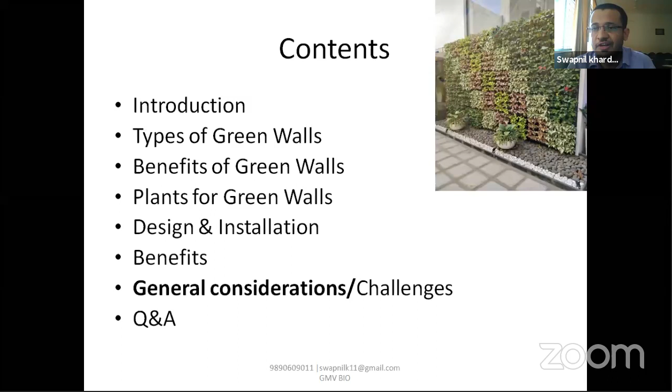In today's roughly 1 hour 15-minute session, I'll talk on introduction to green wall, types of green wall, benefits of green wall, and the plants used for green wall. There are some 70 to 80 different kinds of plants used, but I won't be able to cover all of them. I'll also cover how design and installation is done, and the benefits. The most important part of today's session is the benefits, and then we'll see what challenges we and our competitors face in this field.

As I'm talking about our company establishment, the goal of our company was not to get revenue or run behind revenue. Our purpose was just to cover up all the cement walls with the help of greenery, beautiful landscape gardening. That was the aim behind the setup. We got a good response, so we'll talk later in detail.

The slides I've mentioned contain some theoretical parts, but I'd like to show some images highlighting case studies, the problems we faced, or the idea behind setting up a green wall. I'll talk more on that. So what is vertical gardening or green wall?

It is a special kind of urban gardening suitable for small spaces, particularly for decorating walls and roofs in various styles. So whatever wall you have in urban places - we're not talking rural places, though it can be done there too - whatever kind of wall you have, we can make it look aesthetic. We can change the aesthetic look of that wall. That is nothing but a green wall. The name itself indicates that the cement wall gets covered, and we are here to cover that cement wall and convert it into a greener form.

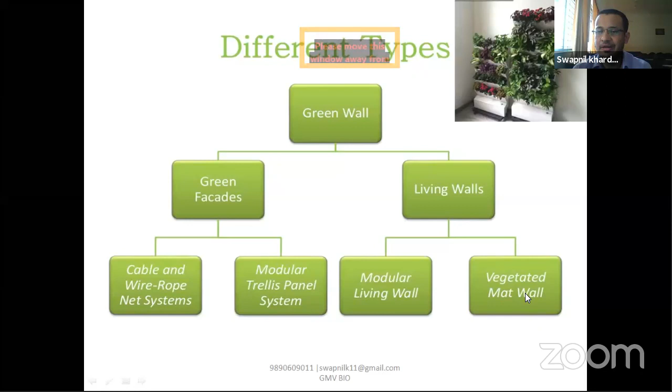Second one, modular trellis panel system. Living wall is again divided into modular living walls and vegetated mat walls. The nomenclature given to this type of green wall, you will come to know with the help of images, or with the help of small content which I'd like to share. So first we'll talk about green facades.

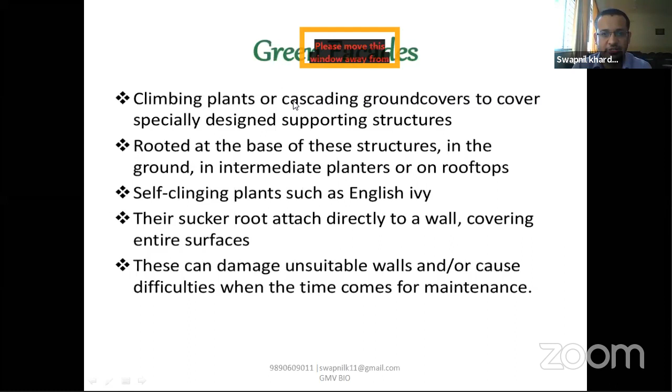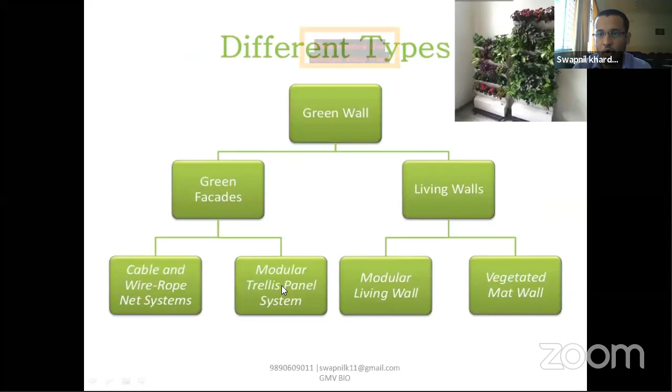What are these? If you look at the images, you will come to know the types of this green facade - cable and modular. So I'm talking first about the cable part - cables and wire rope. From this image you will recognize how we can develop a green wall out of cables and wires.

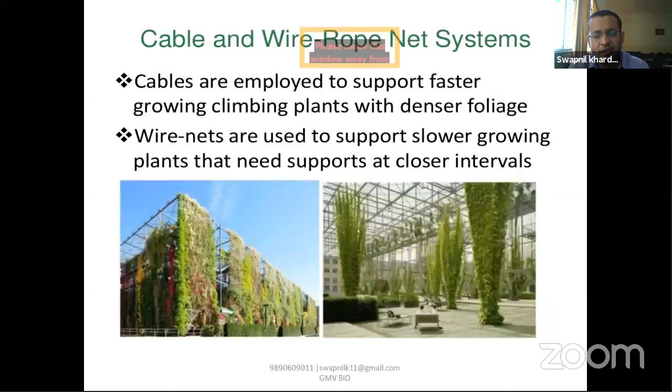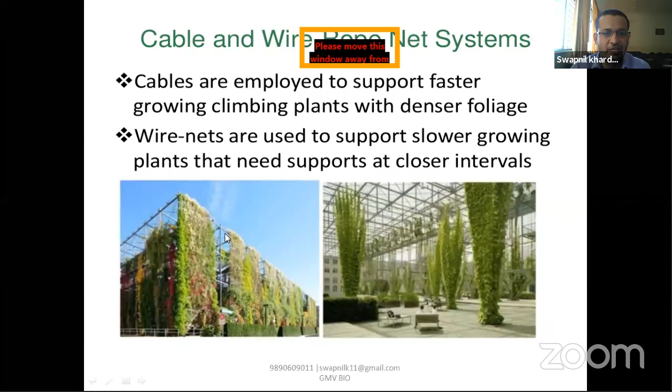Take an example of climber plants, different kinds of climber plants. What is the simple technology done here? This is not what we do, but it's a topic we need to cover. These different types of climber plants - we get the plant and install it on the land, and with the help of cable, these plants will climb up the cable and form a wall. You can see with the help of this - this is the cable and rope net system.

Again, second is the modular system. This is also applicable to plants which are creepers, which climb on a particular wire or any kind of physical place where it's easy for plants to creep up and form a wall. This is used for a small place or small premises - any kind of design can be formed out of this.

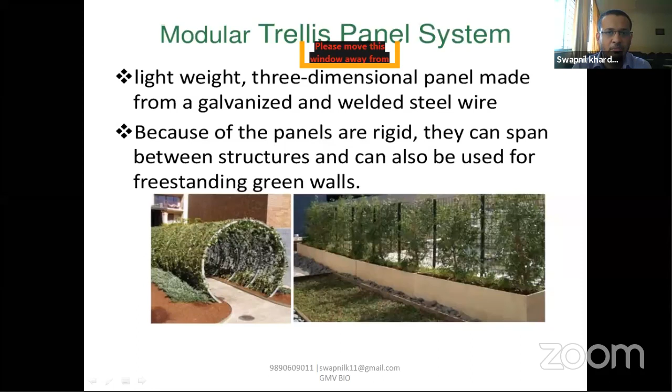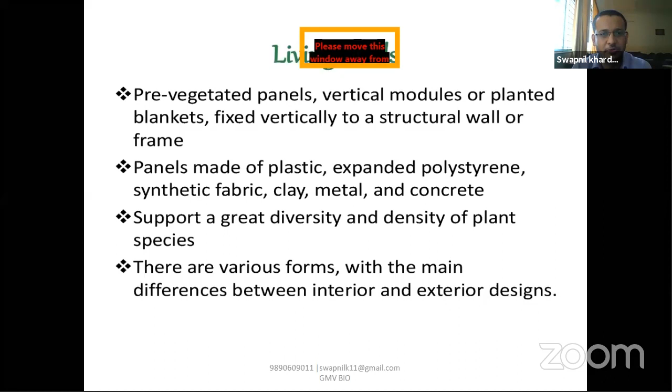So moving further, living wall - this is our core business, this is where we are into, green wall. So how it is done, I will directly show instead of theory. I don't believe in all the theoretical stuff - I'd like to focus more on the images so it gets clear from both angles. So whatever I'll be speaking is right here, and I will show what we are into.

We'll come to that slide for what kind of panels we have, but this is how it works. We first take a picture and form a design of that, and give information on what can be done, whether it is indoor or outdoor. So in short, this is how we work, this is how we install green wall.

The basic requirement for this modular living wall is that we just need any physical cement wall structure. It might be in any condition, it doesn't matter at all - it should just be a wall which is vertical. We'll be installing a green panel to it, that's it. Coming back to our primary objective - that is to convert your physical cement wall into a green wall. This is what we are into.

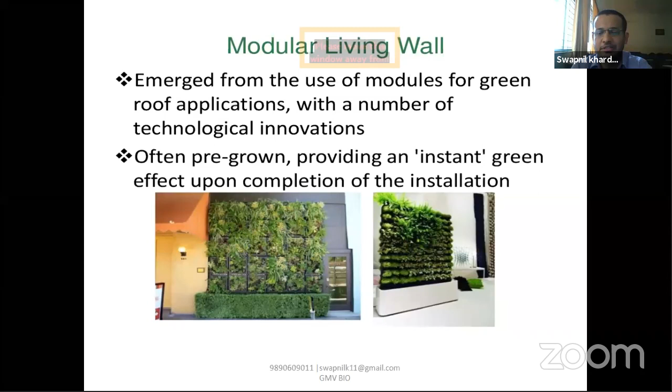This is also one of the vegetated mat walls - we are not into this, but you can see in this case they have a panel system which works as a mat, and the plants are installed in that mat, and it covers the entire wall. You can see from this image the cement wall has been converted into a good greenery wall. From this, I just want to deviate a bit.

When we started in 2017, there were problems. Most of the clients were saying, yeah, it's coming, but there will be a big maintenance cost for the planting and all the stuff - we need to take care of that.

Why don't you switch yourself and go towards artificial green wall? I haven't mentioned that concept in these slides because that is not our core objective of this business. Artificial green wall is okay, you install it once and forget about maintenance. What happens is you get a panel set, just like tiles you purchase from any store, 2 by 3 feet panels, and you just paste them with glue to the cement wall. That's the only thing that happens in artificial green wall.

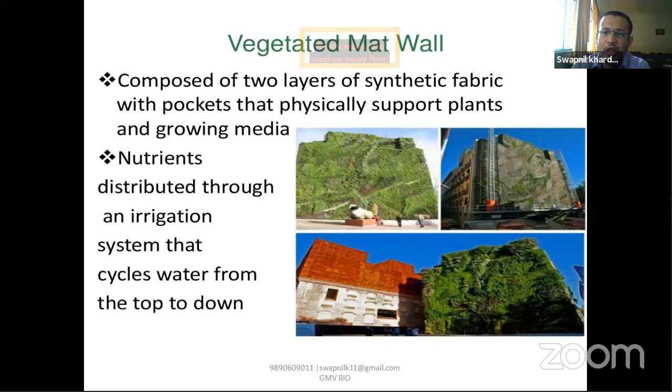Our core focus is to set up only green plants, natural green plants, not any kind of artificial plants. So talking about different plants used in this modular green wall system, I will only talk about the modular green wall system because that's our core business. We are not into any mat system or any artificial wall system, we are only into modular green wall installation system.

So from our side, what kind of plants do we use? As I already mentioned, there are 70 to 80 different kinds of plants that can be used and installed in a green wall. Broadly speaking, we have bifurcated these plants into two categories: first is indoor plants, and second is outdoor plants. Indoor plants are the ones which can survive and give good results in shaded areas. Outdoor plants can survive and sustain in any outdoor condition, whether it's too hot or rainy. So these are the two types of plants we have bifurcated.

Now talking about plants, the most important thing is when we have a discussion with clients, their question is usually based on something they searched on the net, Pinterest, or whatever source they have. They just show us an image on WhatsApp saying this is the kind of green wall we want. We appreciate that they do the search and come up with different plant ideas in front of us.

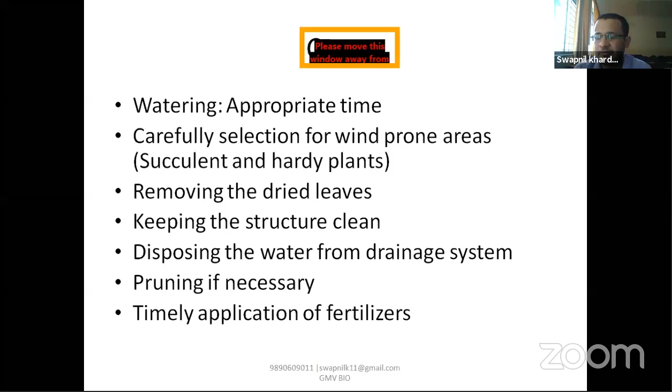Also, if after 5 or 6 months the plants are growing largely, you can just do pruning of that. No need of any kind of mali, gardener, or any kind of support for that. You can do it just like a hobby.

And the last important thing is that once we install, for a minimum of 6 months you don't need any kind of fertilizer dose, because we have already put the granules in the pots. Once the 6-month period is done, you just have to put 3 to 4 granules of whatever fertilizer mixture we have made into the pots, and again sit idle for the next 6 months, and so on.

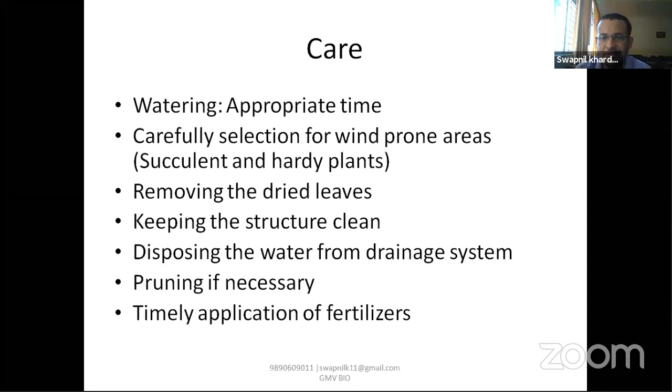So this is actually what we are into, right? How we install, how we go about the installation of the green wall.

When we worked on a project for Indian Oil, they wanted to form a compound wall for their fuel system, right? They had a steel mesh wall with them. I'm not able to show the picture, but they had not developed any kind of compound wall structure for their petrol pump. They asked, can you help, or can you suggest any idea to us?

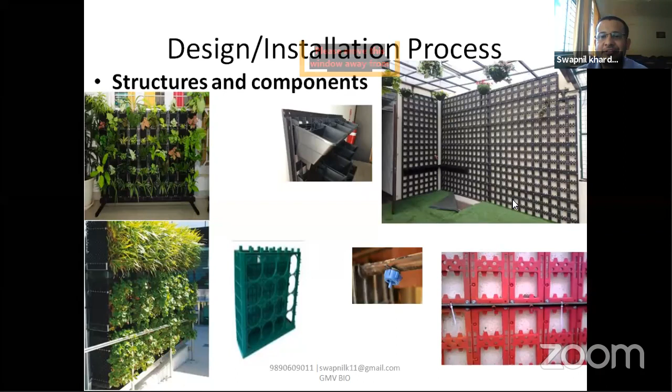Then we ask the client, what kind of design are you expecting? We take that in the initial stage only. So depending upon his design, we change the color combination of plants, or what combination of plants to use. I will come to that slide. So the only thing I wanted to explain from this slide is how we do installation of this green wall.

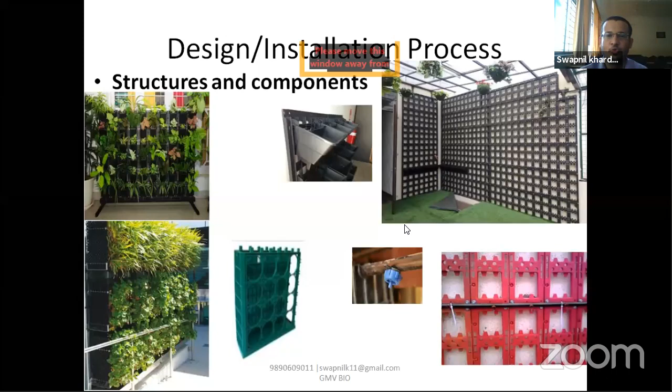After that, the second important benefit is that it acts as a natural insulation for hot and cold air and saves energy for your building. This is a bit of a technical word, but whenever you install this kind of natural green wall - I'm not talking about artificial - to your premises, your surrounding will get cool air.

Then another benefit is that it reduces the air pollution, because it ultimately reduces the CO2 level of your premises.

Now, apart from that, there are few more benefits I can talk about. Sound absorption and noise absorption also happens. This indirectly helps your building, your premises to lower down noise.

And apart from that, another benefit is that whatever quantity of water the plant needs, that quantity only we provide. Hardly we run the water for 1 or 2 minutes, not more than that. Whatever requirement of water is needed for this plant is given for 1 or 2 minutes, depending upon the area, and it is automized. So in this case, the water also gets saved. So these are the benefits of green wall.

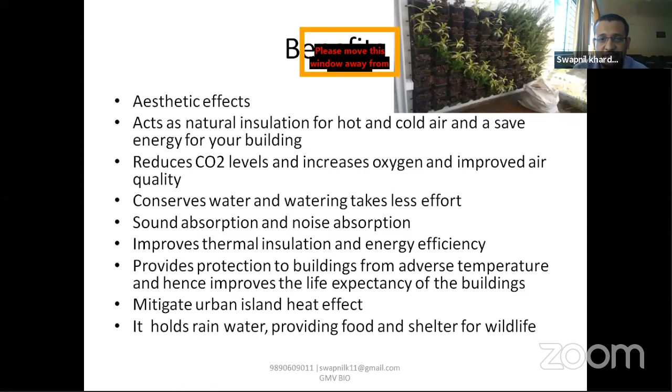We brought a new idea that we will use a bamboo plant, and in that bamboo plant we'll try to insert a layer which becomes a vertical kind of wall that can be given to the guest for that session or any kind of activity. So this is how we are trying to overcome this plastic issue. This is a few slides which I wanted to share with you.

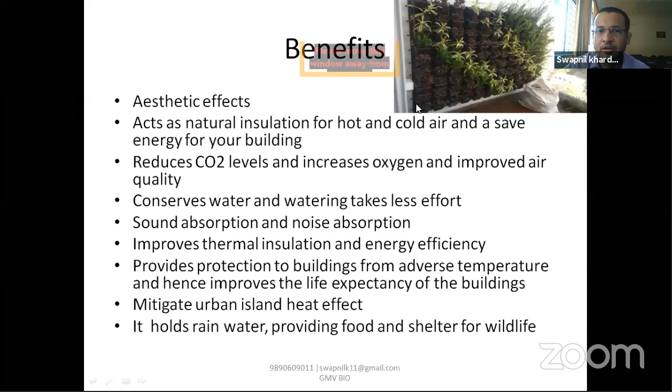But later on, what I found is in the month of summer, all the plants went dried. This whole structure flopped. Now if you visit Pune, you will not find this structure. That's why I'm telling you, the biggest game here is the growing medium. I'm 100% sure the company that took this contract might have used soil in this, because all the disease and pest comes from the soil, and that hampers the plants so they don't show good results.